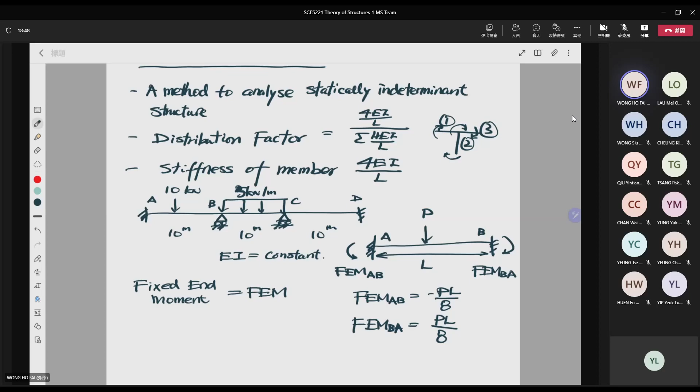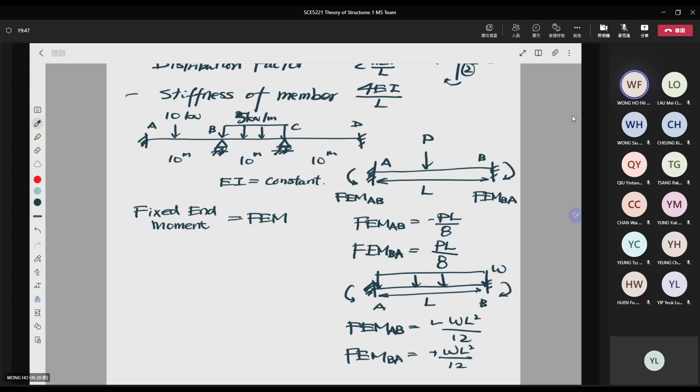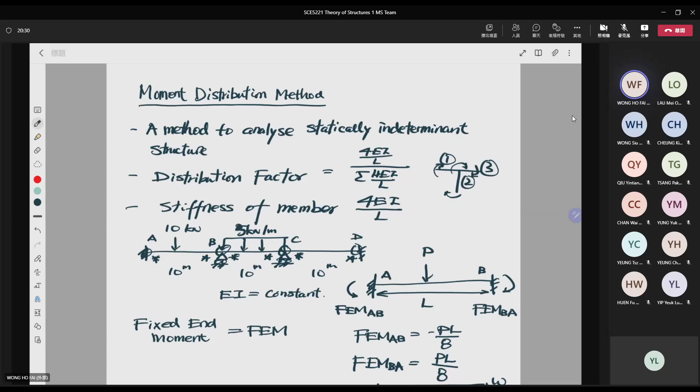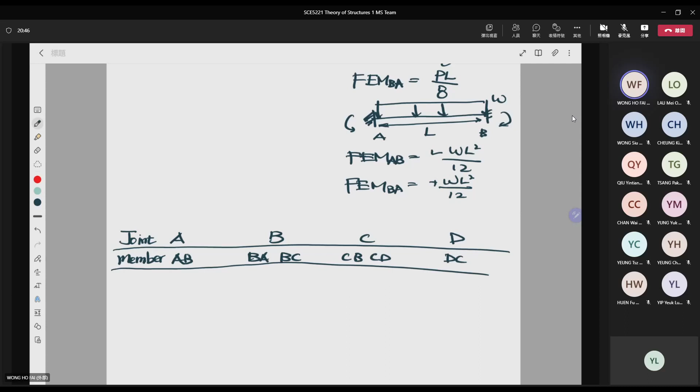做呢條樑時要揾member尾嘅moment，先畫個表。有4個joint：A、B、C、D。跟住有member AB、BA、BC、CB、CD、DC，共6個位置嘅moment，要分別寫出嚟。一開始當所有join係fix，develop咗個fixed moment，然後要加翻balance moment。

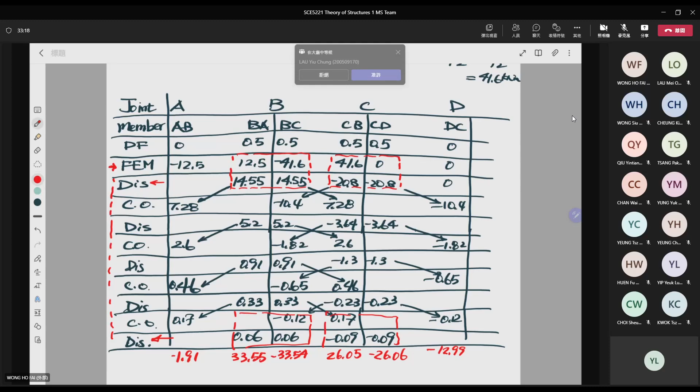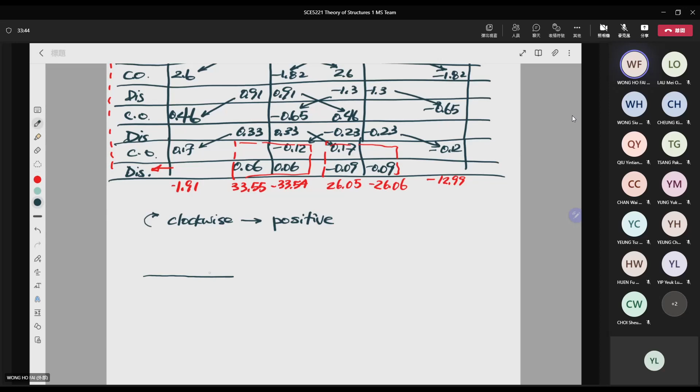由頂至底加落去，第一個係負1.91，第二個12.5加14.5加5.2加0.91加0.33再加0.06，一路加埋得33.55。另一邊41.6加14.55減10.4加5.2減1.82加0.91減0.65加0.33減0.12再加0.06，得到差唔多一樣嘅答案，爭少少係進位問題唔使擔心。

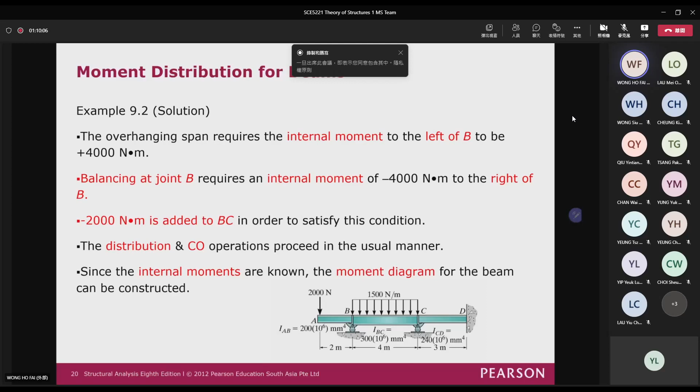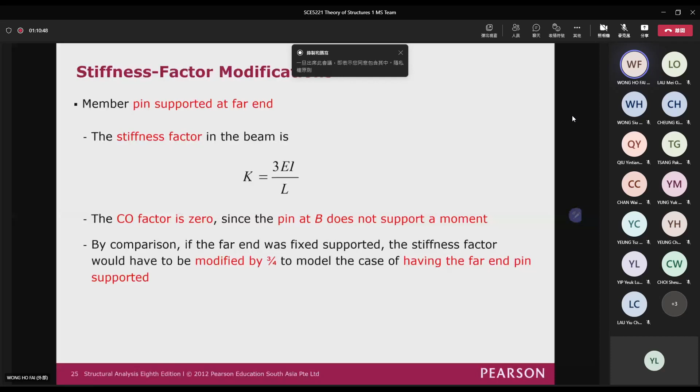As we mentioned just in the tutorial, if you have the end support as a roller support or as the pin support, instead of using 4EI over L, you will use 3EI over L to simplify your calculation. Then you can find the bending moment using another type that not both sides are fixed, while one is fixed and then the other one is actually the roller support or the pin support. Then use that one to simplify your calculations. For other cases, you can ignore them because it is just for your reference.

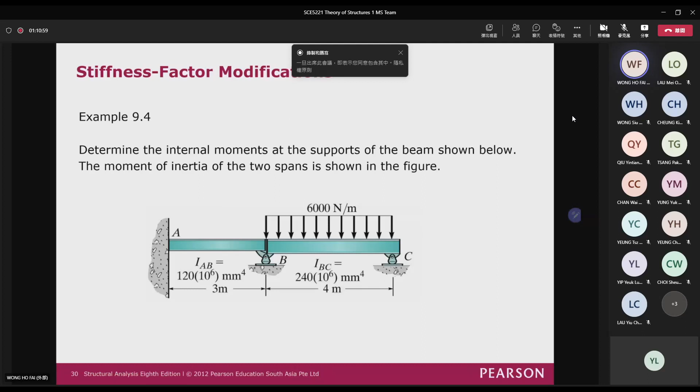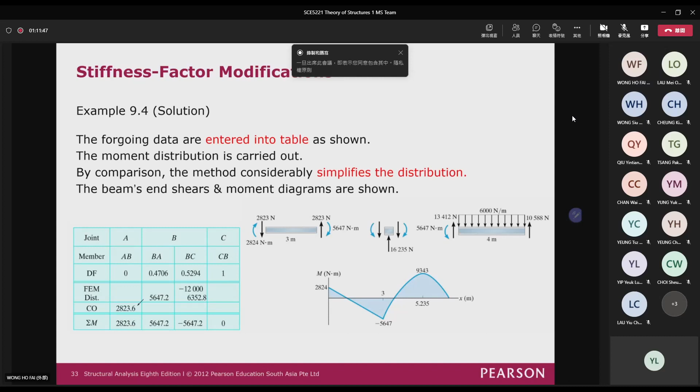Say for example, if you have a beam like this, we have illustrated a similar one in our tutorial. Then you remember that you will choose the bending moment using this type because it is WL squared over 8. And don't use this one because this is both sides are the fixed end, okay? You should use this one because the end support is the roller support. By using this one, you can simplify your calculations and then determine your member ends moment immediately. And then you can use the equilibrium equations to find the shear force at the member ends, and also find the support reactions. And finally, you can plot your shear force and then your bending moment diagram. So this one we have already illustrated in the tutorial.

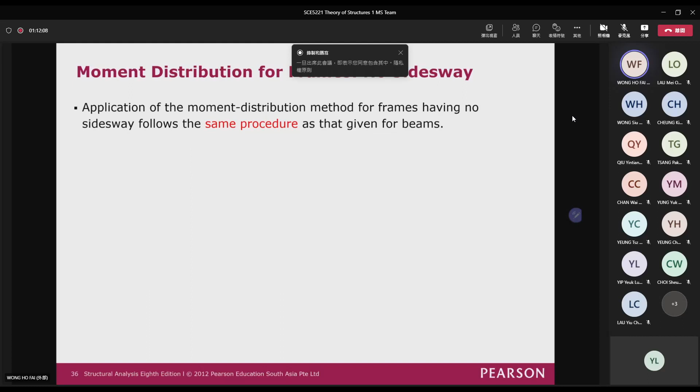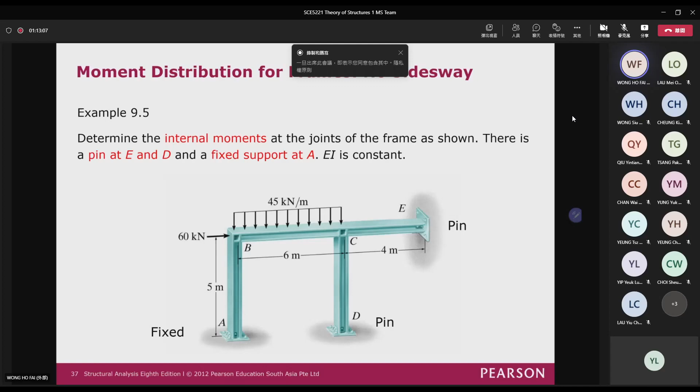You will distribute the moment among the members AB, BC, CD, and CE. Then you will use the stiffness factor KAB, KBC, KCD, and KCE as shown. Because A is a fixed support, you will use 4EI over 5.

For BC, this is similar to what we have done before for internal members. We will use both sides of fixed ends, so it is 4EI over L. Both support D and support E are pin supports, so we will use 3EI over L. We use 3EI over L here, and then 3EI over L right here, because these are pin supports.

For the DFAB, it is equal to 0 because it is the fixed support here, so all the moment will be absorbed by the fixed support. For BA, you use the stiffness factor of BA over the sum of the stiffness. So you use 4EI over 5 divided by 4EI over 5 plus 4EI over 6. These two is the sum, and you put this one as the numerator.

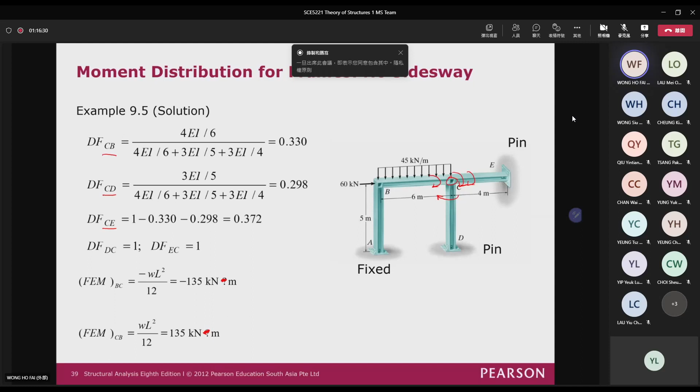Similarly, we will write down a table like this. First you write down joint A, B, C, D, and E. Then you have member AB, and BA, and BC, and for C you have CB, CD, and CE.

For the distribution factor, at location A it's the fixed end, so all the moment will be absorbed by the fixed end. At location B, the moment will be distributed to side BA and BC. At joint C, it will be distributed to three members: CB, CD, and CE, so you have three distribution factors here. D and E are pin supports, so no moment will be distributed or carried over to the pin support.

First, at BC you will have two fixed end moments, and within this joint they will be in equilibrium. For joint B, 135 negative is the moment, and you need to apply 135 to joint B in order to balance this negative 135. Then 54.5% will go to the left-hand side, while 45.5% will go to the right-hand side. So you use 135 times 0.545, which is equal to 73.6, and the remaining is 61.4.

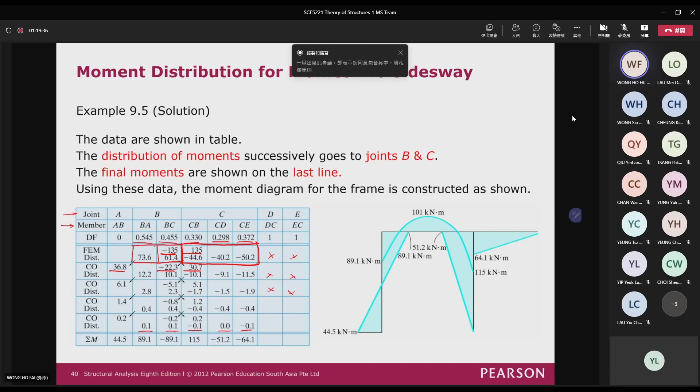Then you add all of them together, and you can find that the moment is equal to 44.5 at AB, and BA is equal to 89.1, and so on. Accordingly, you can draw the bending moment diagram for the frame structures. So this is for the frame, and the method can also be applied to a frame structure with sideway.

Now, first of all, I would like to mention that for the frame with sidesway, it is not in our scope of study, because it is a bit tedious for you to find the answer. So here I will just demonstrate to you how to find the solution, but I won't put it in the examination because it is too tedious for you. But at least you need to know the way how to solve for the answer, okay?

Now you can see that for the frame with sidesway, that means when you apply the load to the frame, then it will deform laterally, that means horizontally in this case. You can see that because you apply the load in an unsymmetric condition, the frame will actually deform in the horizontal direction, and then that means it will have the sidesway, it will deform laterally.

And then for this one, how can we analyze our structures? Well, actually, we can use a method of superposition. You can see that for the first frame, in order to restrain the movement of the frame, we will apply a support right there and make the frame have no sidesway, and then we apply the load.

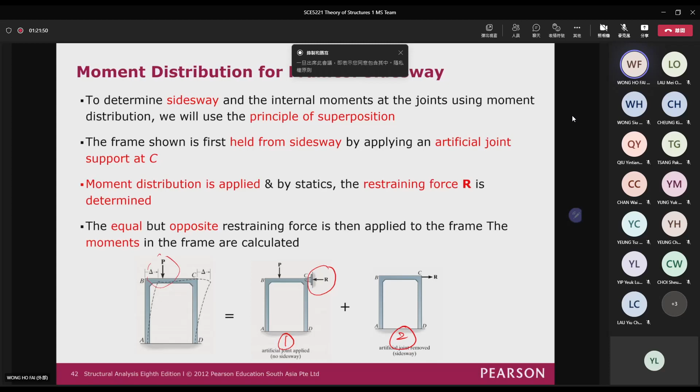So here I have an example to illustrate the idea to you. We want to determine the moments at each joint of the frame shown here, and for here, EI is a constant.

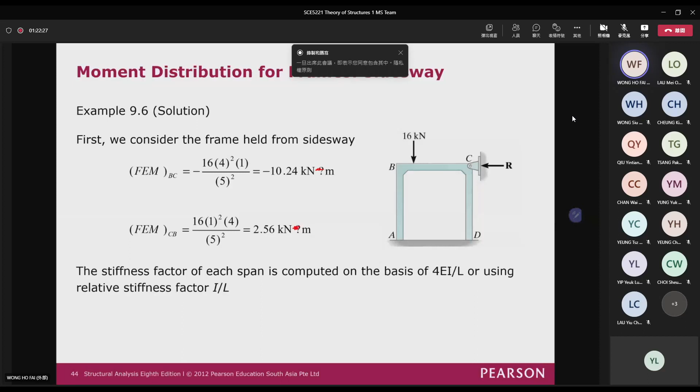And then here, we assume that there is a support at the location C, which restrains the movement of the frame. So for this one, again, we will find the fixed end moment at the section BC right here. We can check it from the table as shown before. And then we will carry out the so-called moment distribution as before.

So you can see that we have our fixed end moment, and then we will distribute our moment among the joint, and then carry over to the other side. We will distribute our moment among the members and carry over just like what we have done before. So this one is actually very similar to our previous process.

And then afterward, you can see that you have the member end moments here. And then you can determine the shear force according to the equilibrium equations.

And then you can see that there's a 1.73 kN pointing to the right-hand side, while there's a 0.81 pointing to the left. So if you take a look at the summation of Fx equal to 0, then you have 1.73 pointing to the right, and 0.81 pointing to the left. That means actually there's a force difference of 1.73 minus 0.81, so the force is actually equal to 0.92.

That means actually there will be a reaction force which is equal to 0.92 acting as a support in order to balance the horizontal force at the member ends. Otherwise, the summation Fx will not be equal to 0. So from here, we can find that actually the resisting force at the joint C is equal to 0.92.

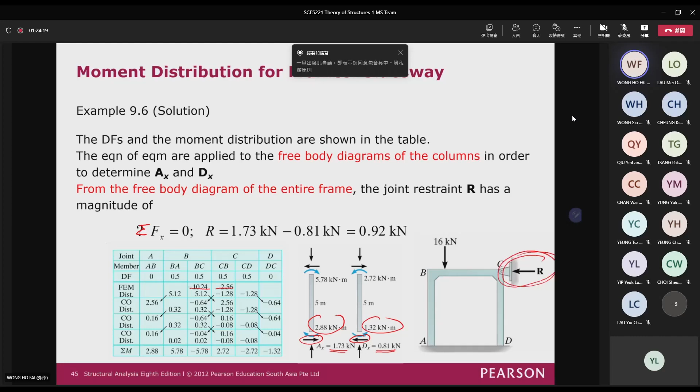Then afterward, we should apply the force at the corner C, of course, in the reverse direction, and then find the member end moment. And then afterward, we will add the two moments together to find the answer.

Now to do that, first of all, we assume that there will be horizontal deflections at the joint B and C. And then we assume that it will cause a fixed end moment at the members AB and CD. So you can see that we assume that there's a delta dash applied at joint B and C, which will create a moment of negative 100 kNm at the member ends of AB and CD.

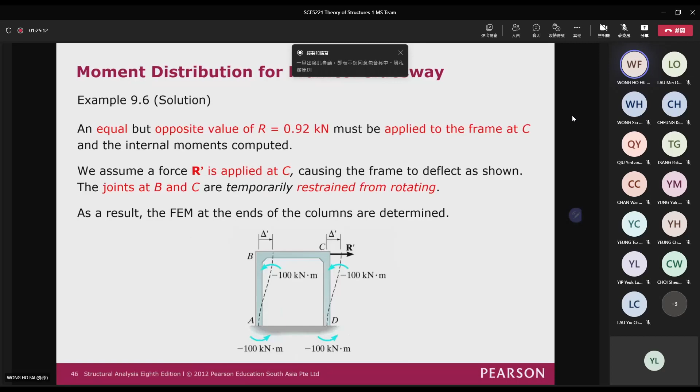And then by assuming that, you can see that we have the fixed end moment at A, B, C, and D. Then again, we will carry out the so-called moment distribution method. And then you can see that we find all the member end moments.

From the member end moments, we can derive the horizontal force on the structure. If we apply the deflection and assume 100 kNm of moment develops in the members, when you add AX and DX together, the force equals 56 kN.

But instead, we just need 0.92. So we do not need to use the whole member end moment, but a fraction of 0.92 divided by 56, where 80 is the member end moment when the force equals 56.

We just do it by proportion: 56 as the denominator, 0.92 as the numerator, times 80, where 80 is the member end moment. This is from case 2, and this is the moment from case 1. So we add case 1 plus case 2 to get the member end moment afterward.

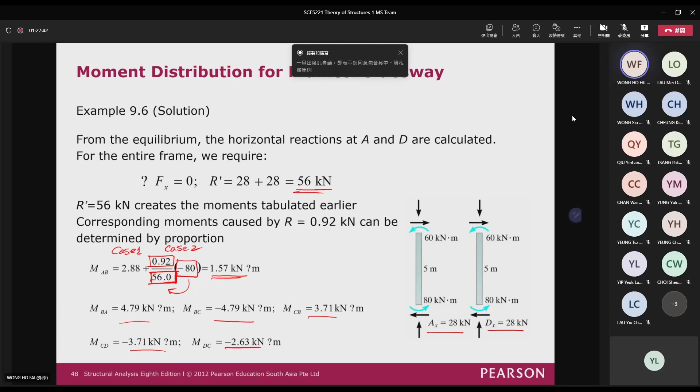So this is the end of moment distribution. Finally, I will go to the final chapter, which is the approximate method for analysis. So this is the last chapter.

We call this the approximate analysis of statically indeterminate structures. We will talk about the use of approximate methods for trusses, for vertical loads on building frames, and for portal frames and trusses. Finally, we will introduce two commonly used methods: the portal method and the cantilever method, which we can use to estimate the loads in frame structures.

So why do we need the approximate method? As you learned from previous topics, we can solve for all the answers within the structure using equilibrium equations, or if we have more unknowns than equilibrium equations, we need additional compatibility equations from the structure. This can be a very tedious and time-consuming analysis.

But in many cases, for engineers, we have the initial design, which is still in the preliminary stage. When we have the shape of the structure or a rough idea of it, we do not yet know what member size to use.

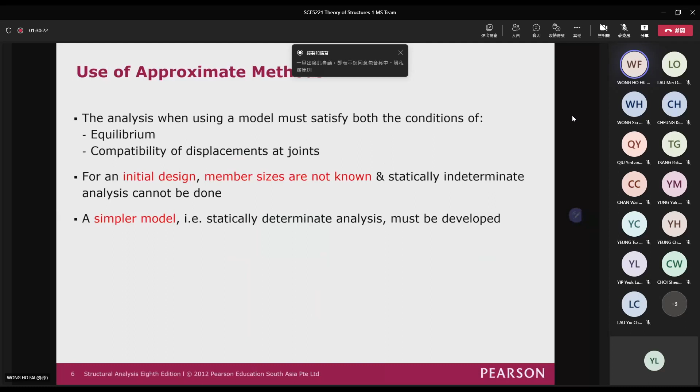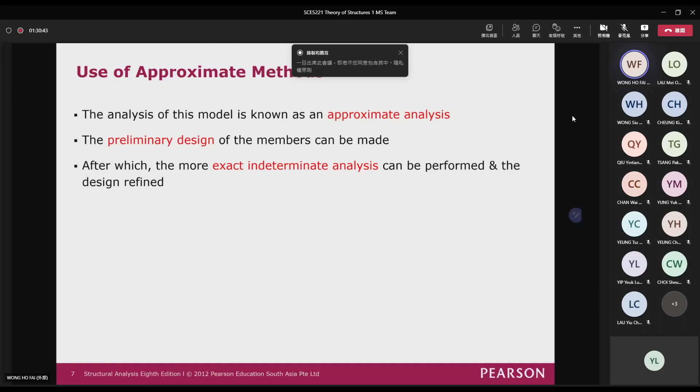This is important because it gives engineers an alternative way to solve for the answer without going into too detailed an analysis. Otherwise, we would put too much time into preliminary design, which is not necessary.

So we make some assumptions to simplify our structures from indeterminate to determinate, so that we can find all the results using just equilibrium equations. Then we can estimate the size accordingly. This is the objective of using approximate analysis.

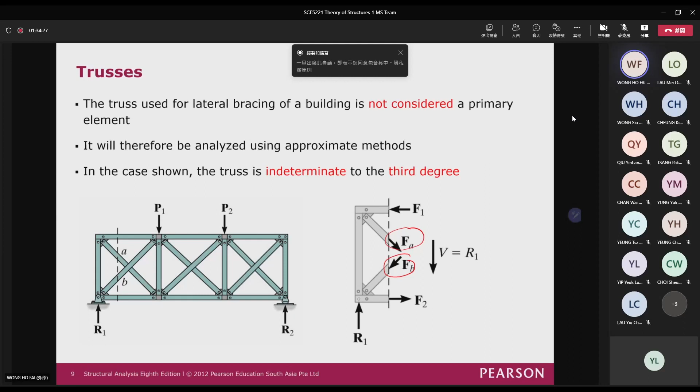For method 2, we assume that both diagonals are equally capable of supporting tensile and compressive force, meaning the force in both diagonals is the same, equal to F. They are responsible for carrying the panel shear together: half of the shear is taken by the tension diagonal, and half by the compression diagonal. This is how we simplify our truss member.

Now we will demonstrate how to simplify an indeterminate truss so we can find the solution quickly. Here, we determine the forces in the members of the truss. The diagonals are designed to support both tensile and compressive forces.

That means diagonals like FB, AE, EC, and BD are assumed to carry the same load, each carrying half of the shear. So the force in AE and FB are the same, and each is responsible for carrying half of the panel shear.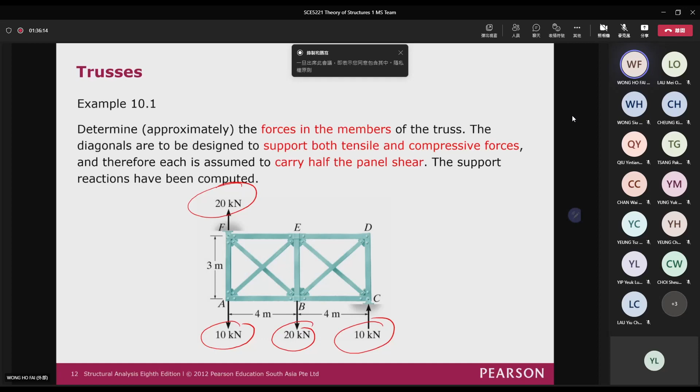Here you can see we have a load of 10 kN here, 20 kN here, and for the support we have 20 kN here and 10 kN here. Now we will cut the free body again and take a look.

You can see this is actually a statically indeterminate structure of the second degree. We assume that when we cut the free body diagram, both forces within the diagonal are equal to F, and both are responsible for resisting the 10 kN shear.

We consider the summation of Fy going up equal to 0. Vertically we have 20 kN and 10 kN going downward, and here we have F. The slope is 3, 4, 5, so if we consider the vertical component, it is 3 divided by 5 times F, which is the vertical component.

of the panel, of the diagonal force. We assume both diagonals are taking the shear, so we multiply by 2: 2 times the vertical component of the diagonal force equals V. So we have 20 minus 10, minus this one, equals V.

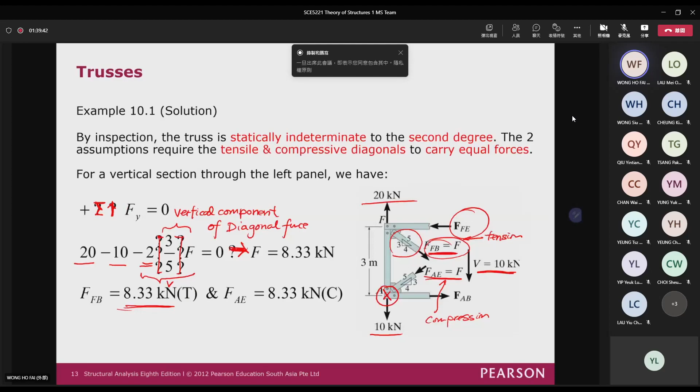Then you just take the moment at A. So you take moment here, and you can find the value of FFE. Here is simple: you have the value of 8.33 in the diagonal, and then you consider the horizontal component, so you divide it by 5 and times 4—that gives the horizontal component.

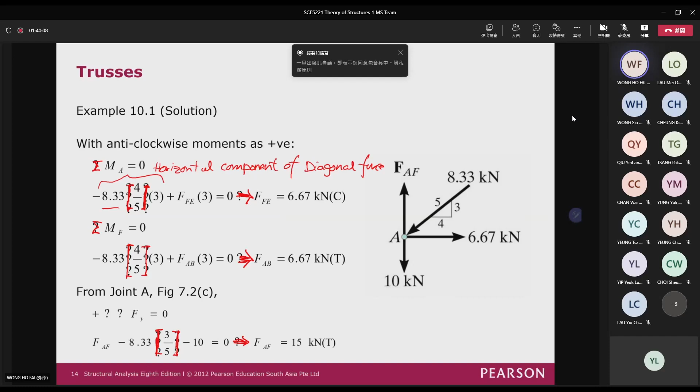of the diagonal force. Okay, and then you have FFE times 3.